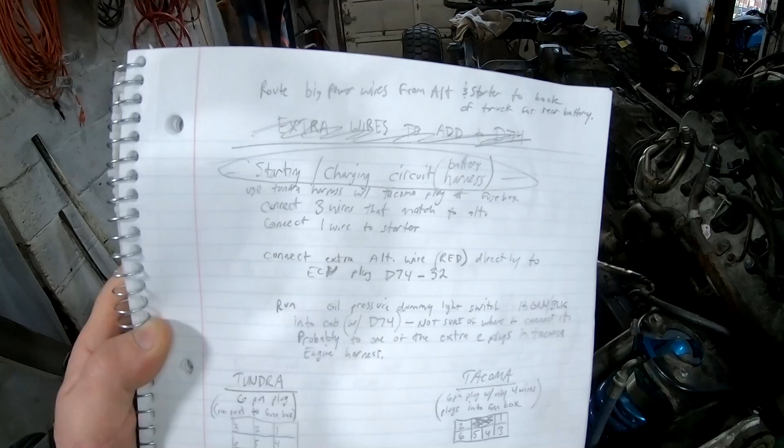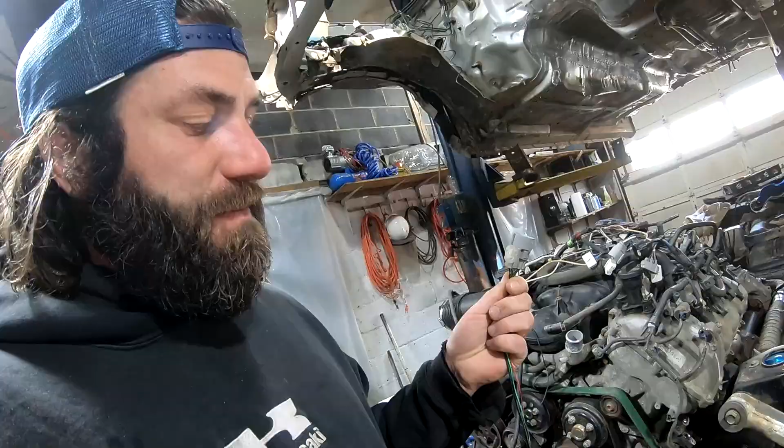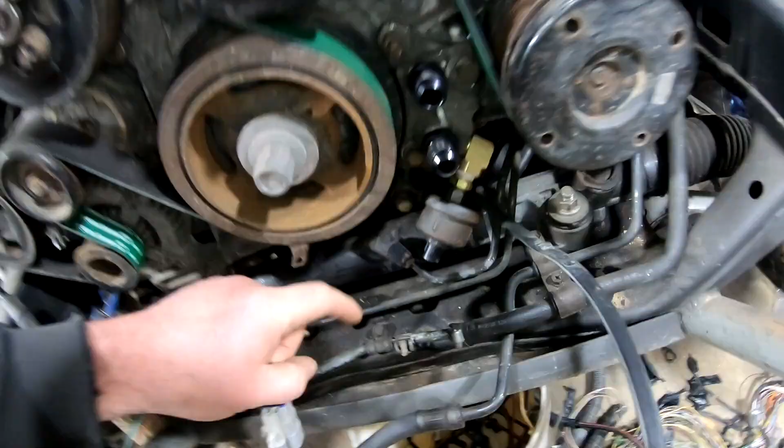Now my notes might look a little scrambled, but it's actually probably much simpler than it looks here. At a glance, it looks like this is all part of the engine harness, but it's really not. This is a separate harness you can completely remove. This basically just consists of power and ground for the battery that runs up here to the driver's side front corner of the truck. And there's one 6-wire plug that's intertwined with this that would have plugged in up near the Tundra's fuse box. 4 of these wires run to the alternator, 1 goes to the starter for the signal, the other one runs down here to the oil pressure sending unit.

Now on the Tacoma harness, we have what could be a 6-wire plug, but there's only 4 wires in it. 3 go to the alternator, 1 goes to the starter switch, and the oil pressure switch is not in this. For the Tacoma, that's actually built into the engine harness. Since I'm going to put the battery in the back of this truck, the first thing I wanted to do was split this whole harness open and weed these wires out.

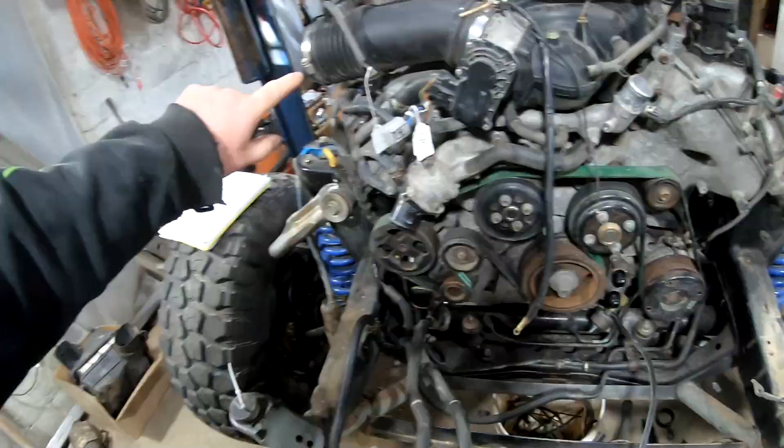I'm going to send power and ground to the back of the truck instead of up here to the front corner. So that leaves me with this 6-wire connector and connectors on the other end of it for the starter, oil pressure, and alternator. Instead of running them up around here like they were, I'm going to run them back this way and up over with the rest of the harness so they can plug in with this. But since this only has 4 wires on it, there's only going to be 4 wires running up there.

For the other 2 wires, one of those wires is the extra alternator wire. That's going to run directly to the D74 plug right here. The other extra wire is for that oil pressure sending unit, and I'm not sure where it goes. So I'm just going to run that back towards the body harness and let it hang for now. We'll figure out where it goes later. Insert time lapse here.

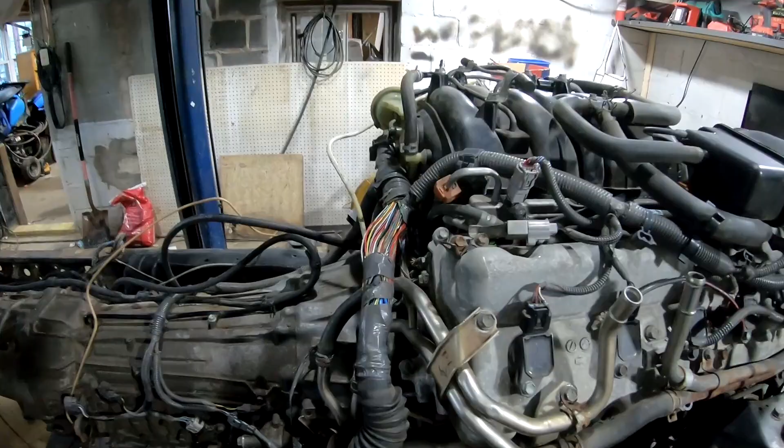Alright you guys, I just had to interrupt Black Flag so I could show you what I'm doing. See all these wires right here? Whew, sheesh. Lord have mercy. These wires all run up to the D74 plug that goes to the ECU, and these other plugs that go to a whole bunch of stuff that eventually goes into the cab of this truck, but originally went into the cab of a Tundra.

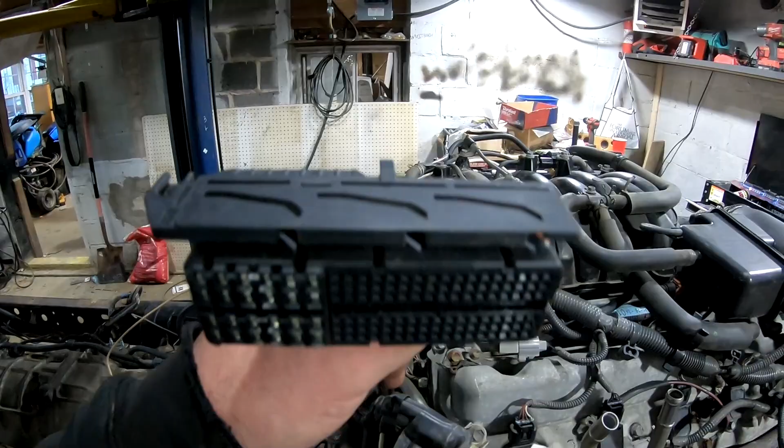So anyway, I'm going to start sniffing through these wires now. Rather than trying to run all the way to this D74 plug, I need to find a red wire that runs from back here up to here in the number 32 spot. So I'm going to get out my trusty voltmeter.

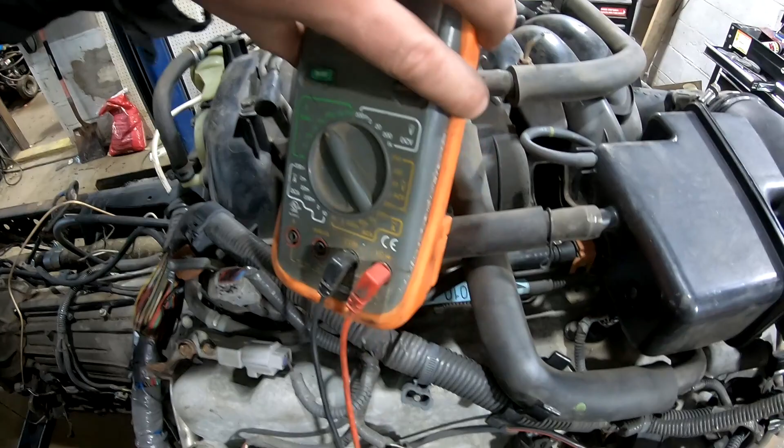I'm going to kick this little guy on right here, flip this down. Whoa. Okay. See the ohms right there? We're going to flip this thing to this little guy right here. See that? Is this light on? I guess it is. Yeah, it is. Oh, it's very dim. We're going to flip this to this spot right here. That means we're going to hear a sound when these wires connect. Hope you can hear that.

So in here, I'm going to have to figure out which one is number 32. Stick one end in there, and with the other end, I'm going to have to probe these red wires, figure out which one it is. We're going to tie right into that little sucker. By the way, let me explain why we're doing this.

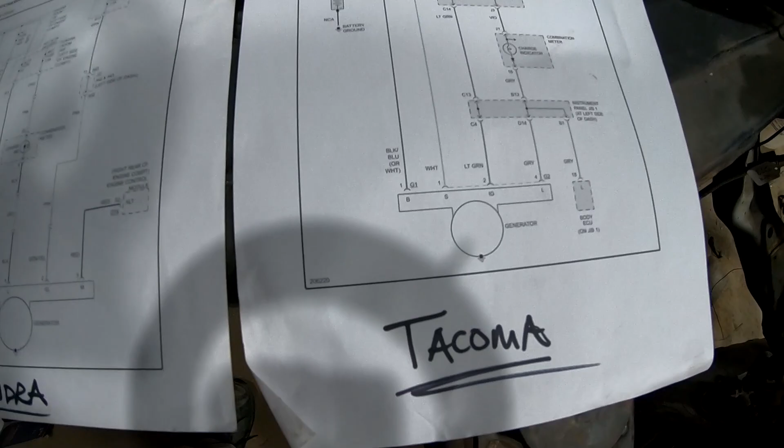Show you these diagrams. Here is Tacoma. Here is Tundra. Oh man, the lighting sucks. Hold on. All right, much better lighting. New battery. Okay. Here's our Tacoma diagram, and here's our Tundra diagram, and these should pretty much be the same.

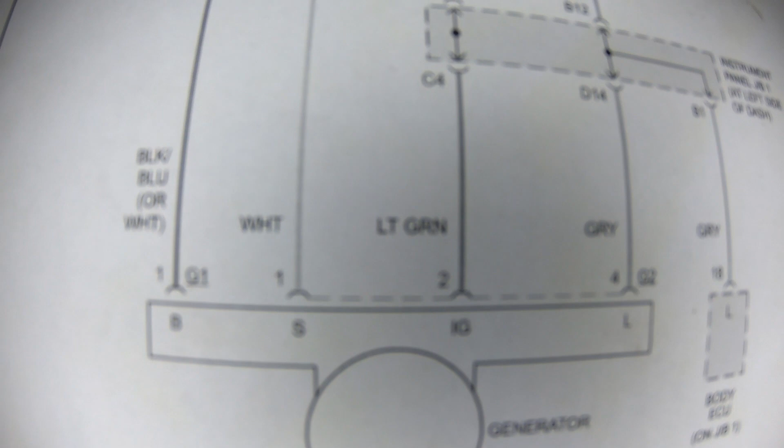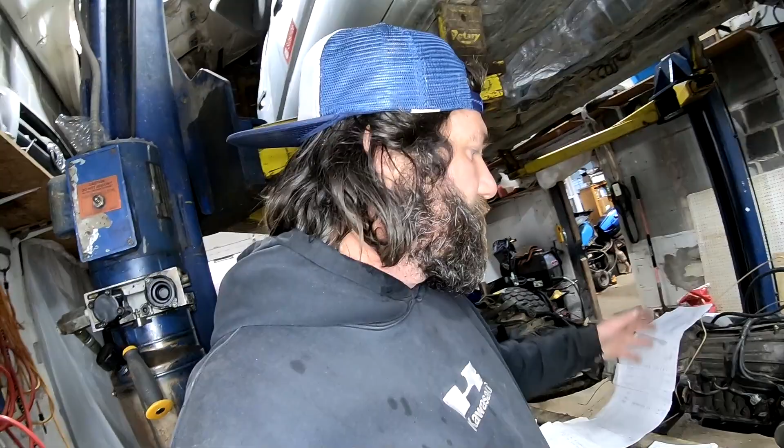This is our charging circuit, but as you can see on the Tacoma diagram, we have 4 wires to the generator, and on the Tundra diagram we have 5 wires to the generator. The extra wire is right here, red, and this goes to the D74 plug number 32. So basically all this wiring's the same, except we get an additional wire. I honestly don't even know what it's for, but that is the extra wire. So that's why we're wiring this directly through here to the ECU in the number 32 spot.

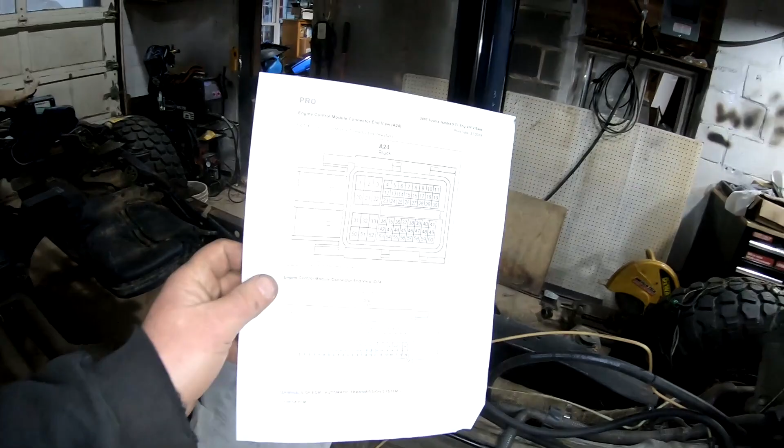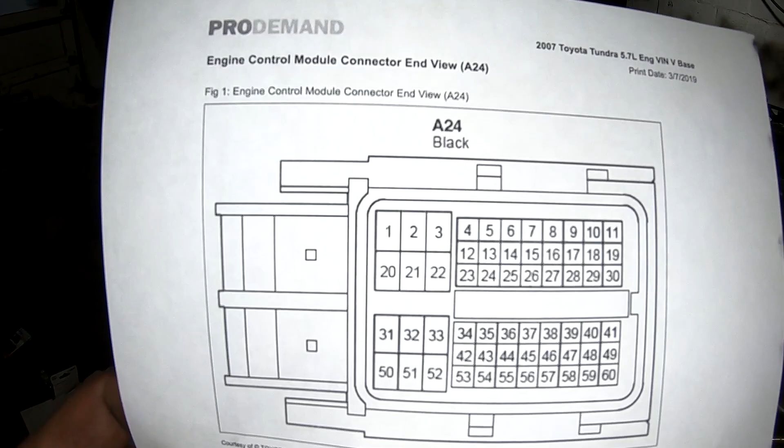Where is the number 32 spot? Well, let's find out. Check out these here diagrams. Okay, this is D74. By the way, this is A24. We're going to be dealing with this plug later. All of these wires are going to need spliced. D74, just a few. And in fact, this might be the only one. There might be a few more, I'm not sure. But for now, this is the only one we're going to have to deal with.

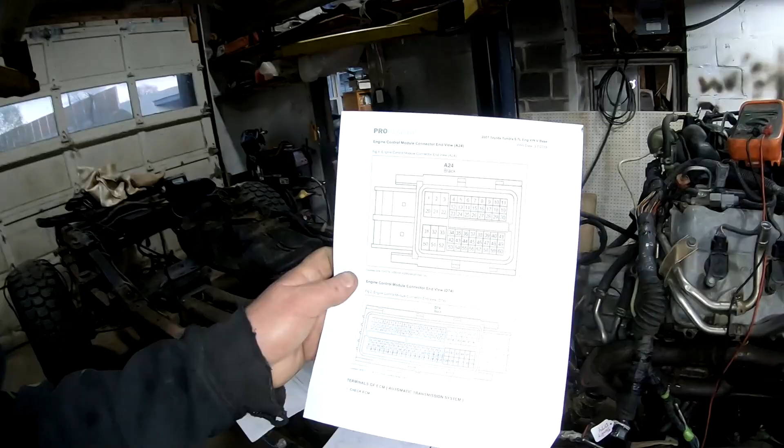I'm not going to tape this back up yet until I'm sure, because I forget. This has been a long journey, you guys. Bear with me. So D74, we need to find number 32. Right there it is, you guys. I should probably pop this off of here and make sure we found the right red wire. Just snip this off of here.

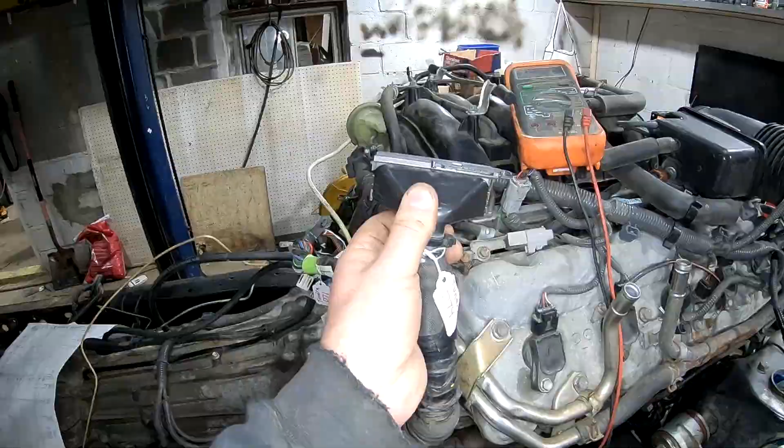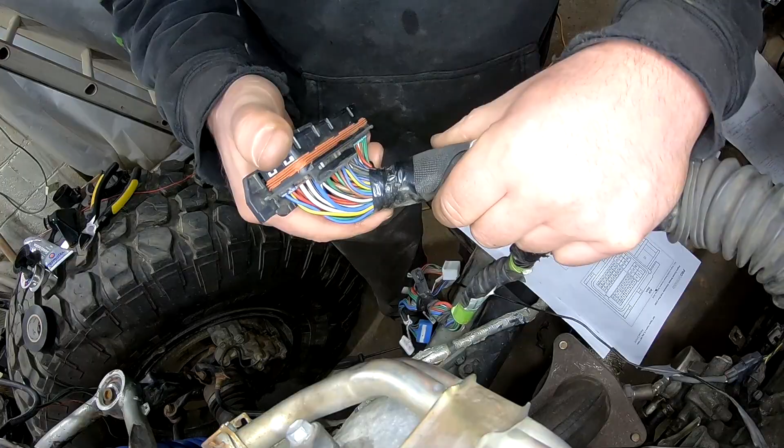All right. If you saw, maybe 7 or 8 in this series, you see that I already had this apart to repair it. So we're going to open this back up again now. Just going to flip this around like this so it matches my diagram here. And now we need to find number 32. We know it has to be red.

It's right here. So, damn, you know, I'm going to go get my old man glasses. Hold tight. All right, the glasses, they show experience. It's kind of like gray in the beard. Chicks dig it.

With the glasses, I can get in real tight on this and sniff it out. There's usually some numbers. If you look real close, you're not going to be able to see it because the GoPro doesn't really film that awesome up close. For that, you'd need my glasses. Actually might work. No, it's still not going to work. But anyway, for me to see those, I got to get in nice and close.

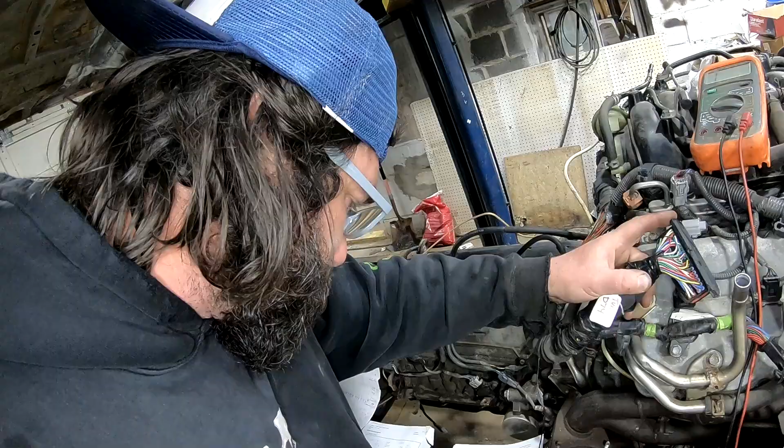There are little numbers back here, and I was quite surprised to see like number 110 over here. According to this connector end view, there's 126 wires in this. It's a lot. Or at least 126 spots for wires, okay? So now that I see the high numbers are up here, that means my low numbers are here. That means I'm looking at this backwards. We gotta flip this like this.

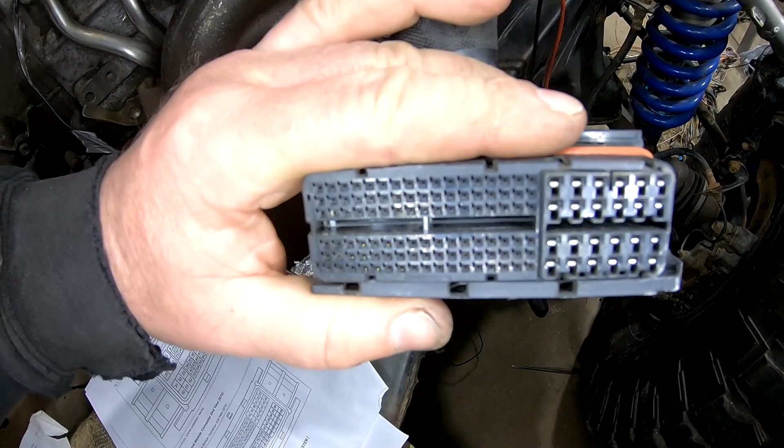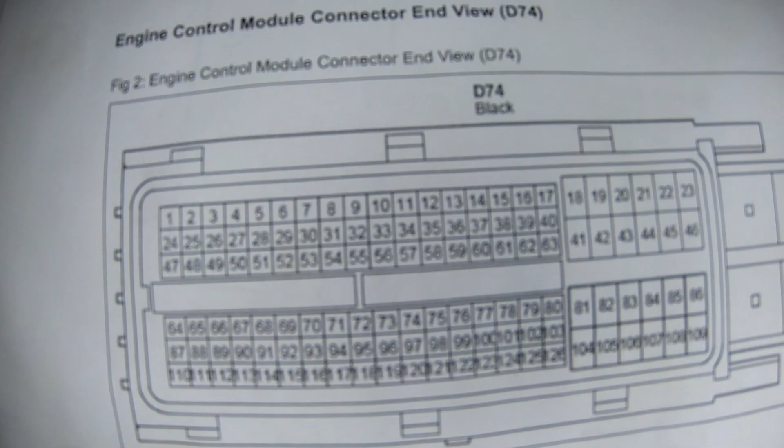Now number 1 is up here in the top left, just like in the diagram. So now we can find number 32. That is in the second row. And that is, let's see, 9 spaces over from the left. So I can walk over 9 spaces and flip this around and figure out where it is, but whatever. I don't even have to do that.

So we go down 1, over 9. That's where this has to connect. So the one end of my multimeter is going to go in here, and the other end is going to come over here. We're going to start testing red wires and make sure we find the right one that is connected, so we know where to splice into. Ooh, hear that, you guys? Bam! This is the wire we need right here.

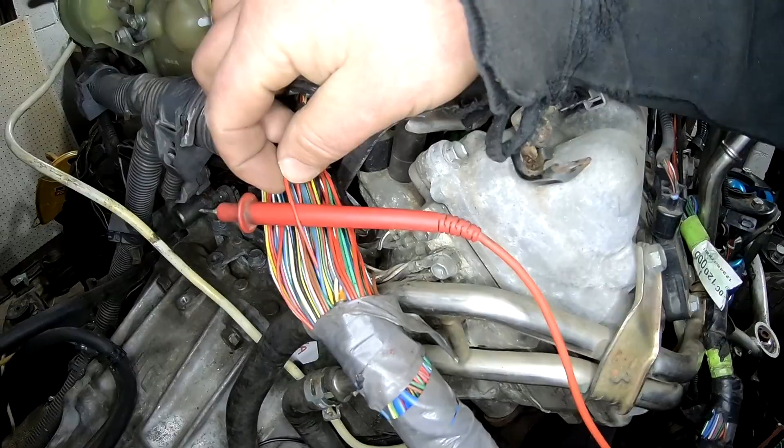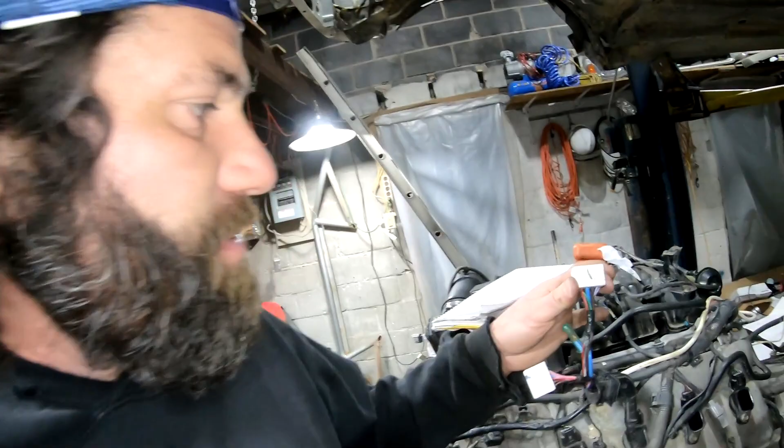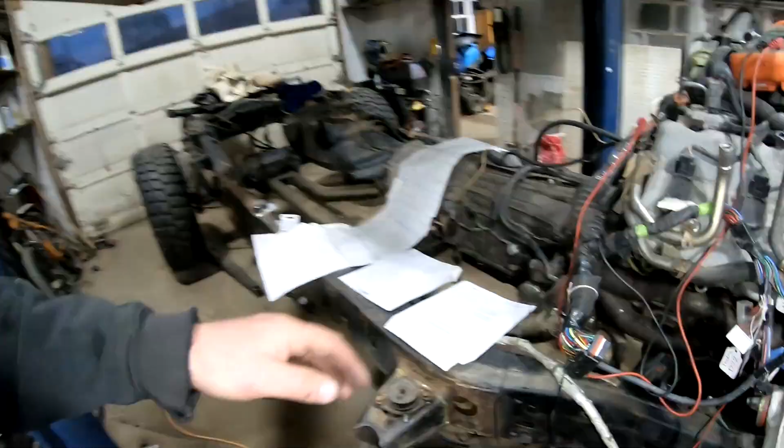Shut up, music. So, changing pages, literally, in my notebook here. I know that that extra plug in the alternator runs up through to this plug in the fuse box to number 6. And if we look at this like this, 1, 2, 3, 4, 5, 6. Flip this over. Right there's our red wire. This is the wire that we got to connect directly to the D74 plug over here. That wire isn't going to be needed over there anymore. We're going to connect it right here.

So basically what we're doing right now is making the alternator and starter wiring part of the engine harness. Before it was a separate harness. I'm going to make it all one harness, and I'm gonna make the battery's power and ground separate. So we've got the extra little harness that I've run up here in this loom. This is the extra wire that the Tacoma didn't have, and this is where it needs to connect to.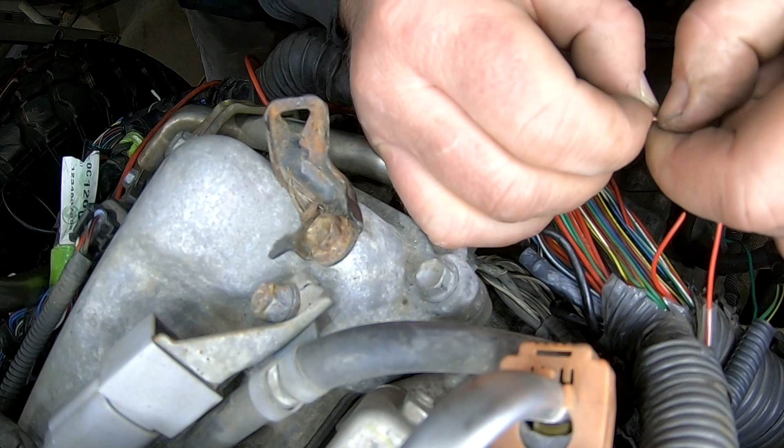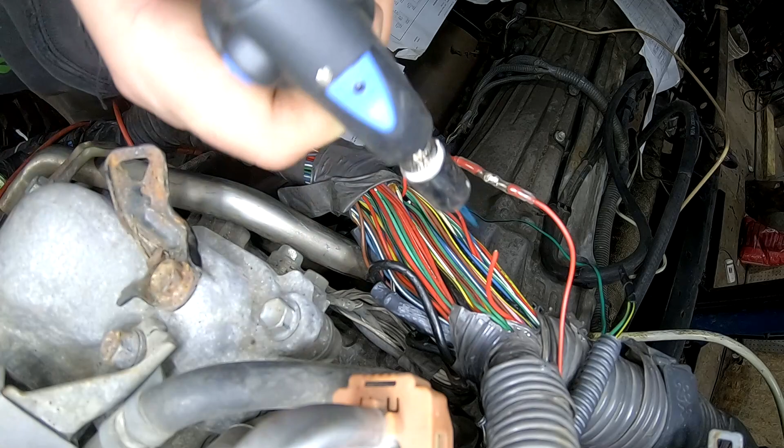Now you got to realize that normally this was going to run a different direction altogether. We're taking a shortcut, running it straight over to here. So I'm going to snip this little guy right about here, and we're going to connect these two now. Usually I just kind of tape everything, but in this truck I'm planning to shrink wrap everything. By the way, I got the clear shrink wrap so I could really see and make sure everything's good. Yeah. So this is good now. That's going to directly connect that extra alternator wire to the ECU.

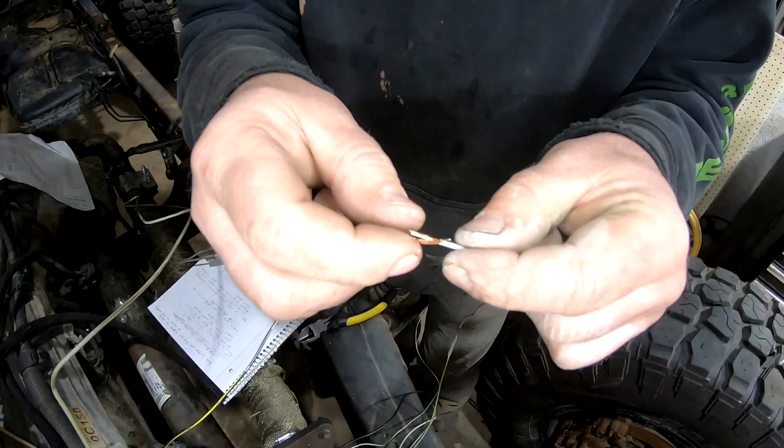I now got 4 wires running up from my harness. And this is the plug that's got to plug into the Tacoma's fuse box. So we got to mix and match these here wires. I got to connect this to the white wire in this harness. Twist these together. Warm it up, Chris. All right, so our first wire is done. This is now connected to this plug.

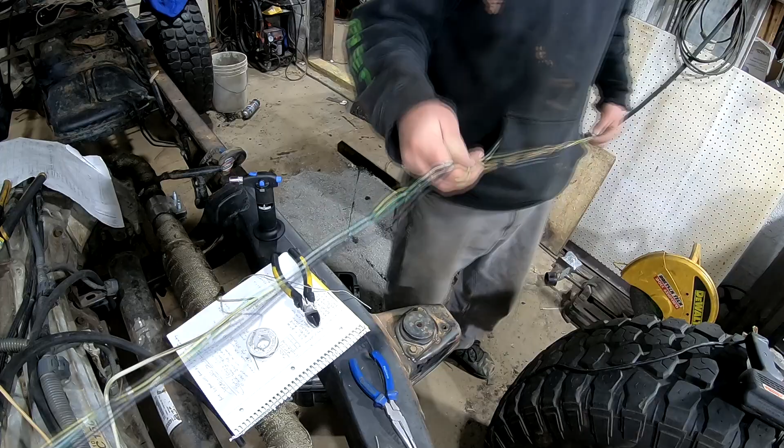Thicker black wire is going to go to the thicker wire on the plug, which is yellow with a green stripe. And the plain black wire from Tundra connects to the gray wire from Tacoma. I'm cutting these all at different lengths so we don't have a big cluster of all these connections all at one spot. That's just asking for trouble. So we're going to cut these at different spots. There's only 4 of them, so it's pretty easy.

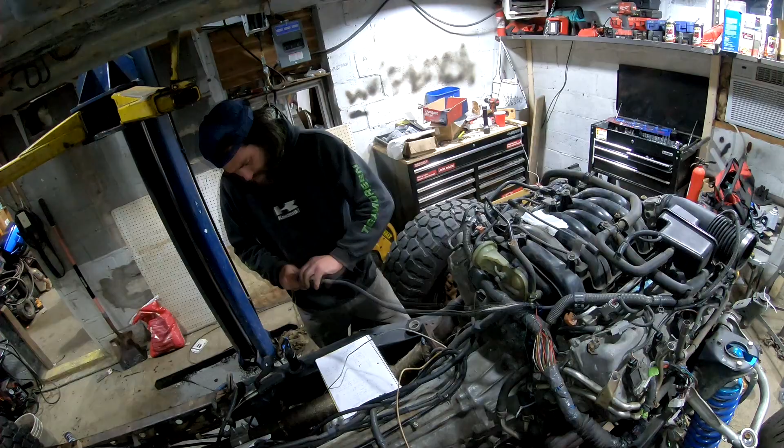So we got 4 wires here, plus this main power wire that powers up the entire fuse box. And this runs down and connects in with the alternator and starter. So I'm going to loom these all up together. The only part of this battery harness that's left now is the ground wire. I'm going to take this off of here just because I'm planning to put the battery in the back of the truck. So this just bolts onto the block here. This would bolt onto the body.

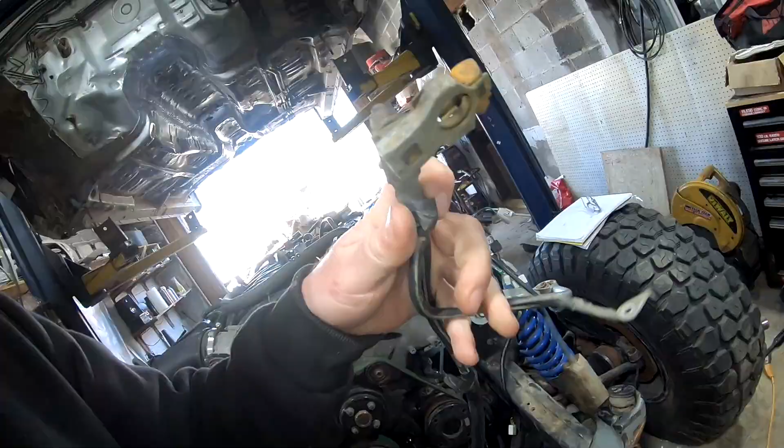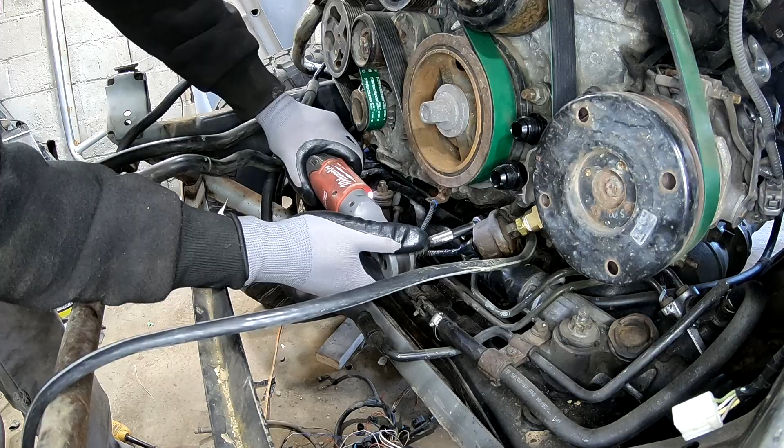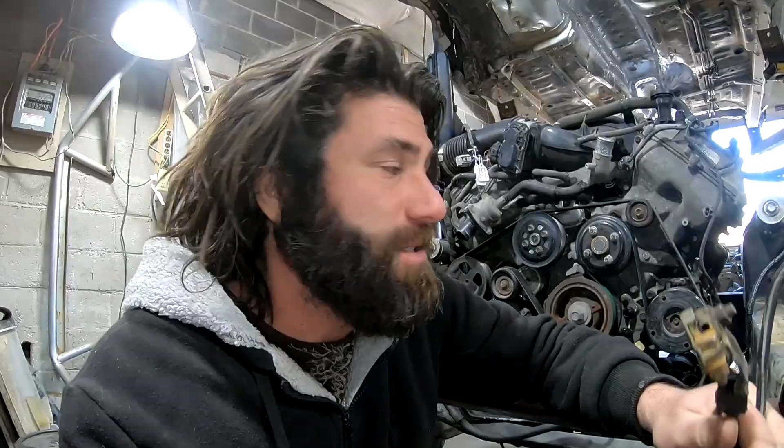For now, I'm just going to swap this out of here for a ground wire that just goes from the block to the frame. And then my battery in the back, I'm just going to ground that to the frame. I just unbolted this ground from the block, and I just realized I don't even have to put one back on it because I didn't put rubber motor mounts on this thing. So my mounts are actually grounding the block probably better than this ever would have.